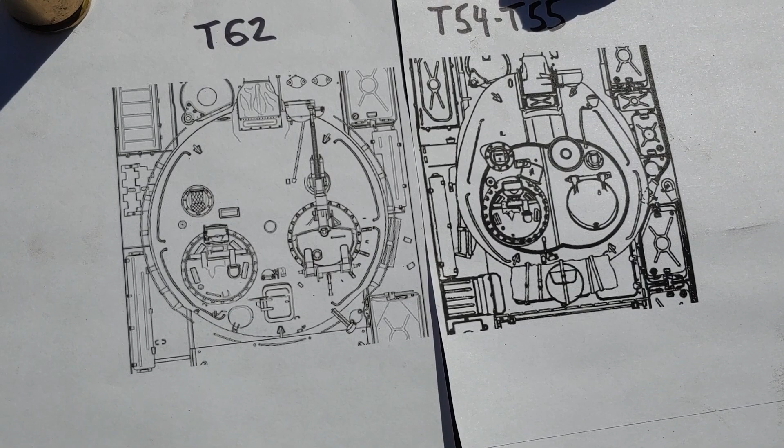Those key recognition features on the T55: the bore evacuator is way towards the front of the muzzle. At the end of the day, T55, T62, it's all about the gun. That spacing in the road wheels on the T55, right at the front there, the general overall shape of the turret, and the welded cast plates versus that one piece cast on the T62.

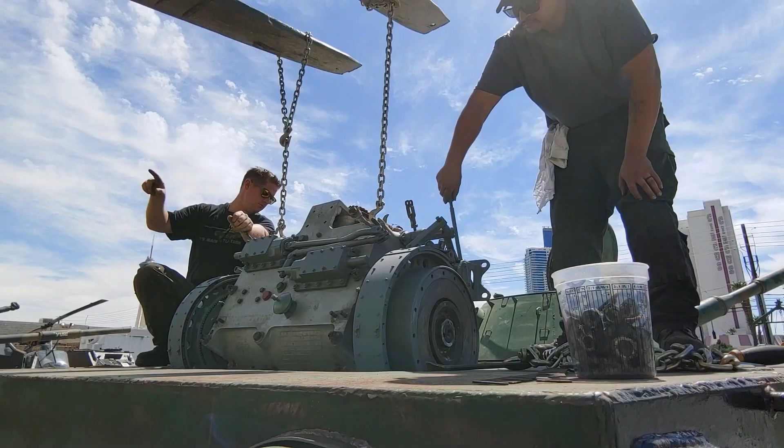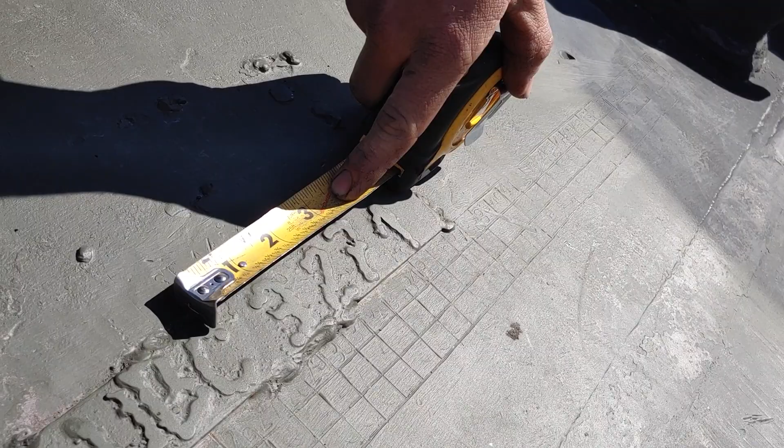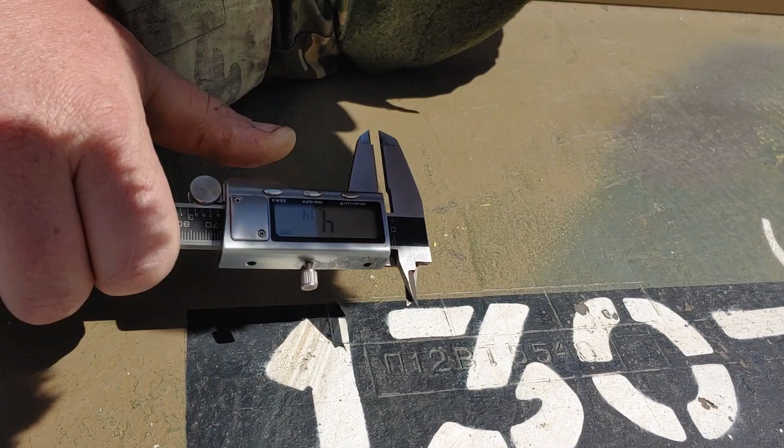Hey Scott, we got 0.6 centimeters between the lettering on the serial number. Oh, alright. I got 4.14 micromillimeters. So how many rivets have you got so far? I counted 3,871.6 rivets. Well, I got 3,876.2 rivets. So it's different. Yeah? Looks so. Count it again. All right?

Okay, rivet counters, this one's not for you, all right? No more. That's it. We're just going to talk about the basics. We're not counting rivets.

We have the T55 AMS, which is a very heavy Polish modification, and then we have a mod 1972 T62A used by the Syrian army. Now these tanks have evolved quite some way from their base when the Soviets actually built them. So we're not going to focus on specific upgrades that the Polish might have done for the Merida system, or what the Syrians were doing. We're just focusing on the nuts and bolts T55, T62 without getting into too much further depth on the different variants.

Alright, it's a T54, T55 was produced from 1946, and according to some sources about 100,000 of them were produced. Then T62 was produced from 1961, with estimates of between 19,000 and 22,000 of these ones.

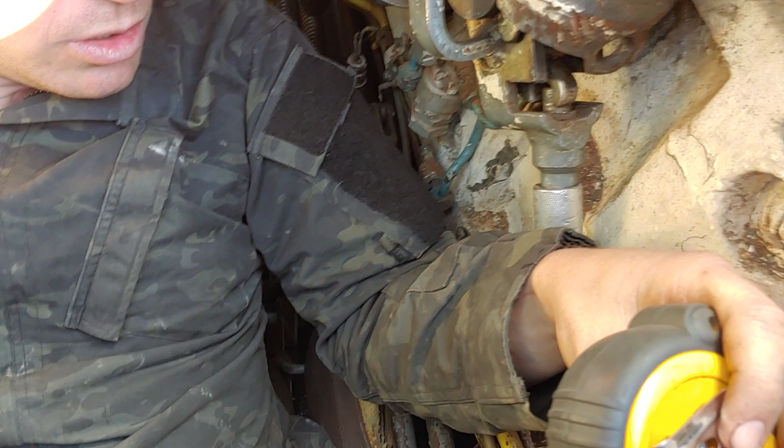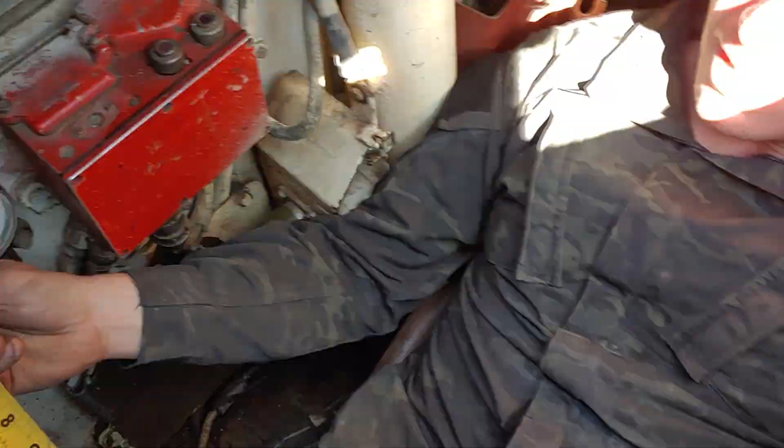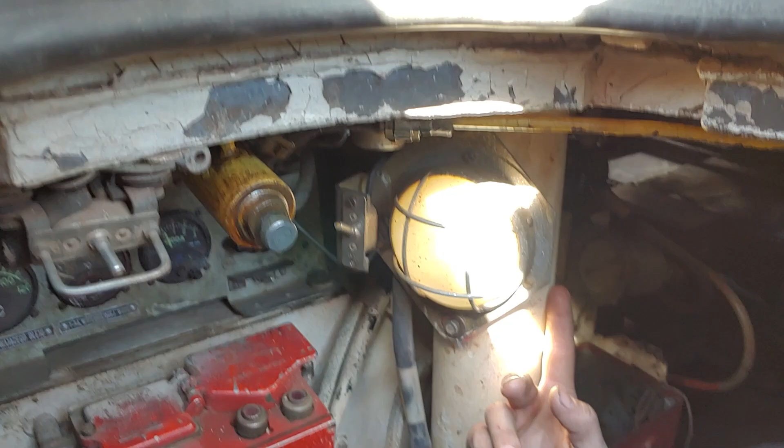So we're inside the T55. We're measuring from the battery box over to the sidewall. There is the nuclear protection layer right here, which is roughly an inch thick. Right now we're measuring at about 31.5 inches. So in the T55, one of the reasons it may feel smaller - well, it does feel smaller inside here - is that we have this post right here, which might be some sort of structural beam, and we also have the fire suppression control box, which in the T62 is actually located forward and kind of more out of the way.

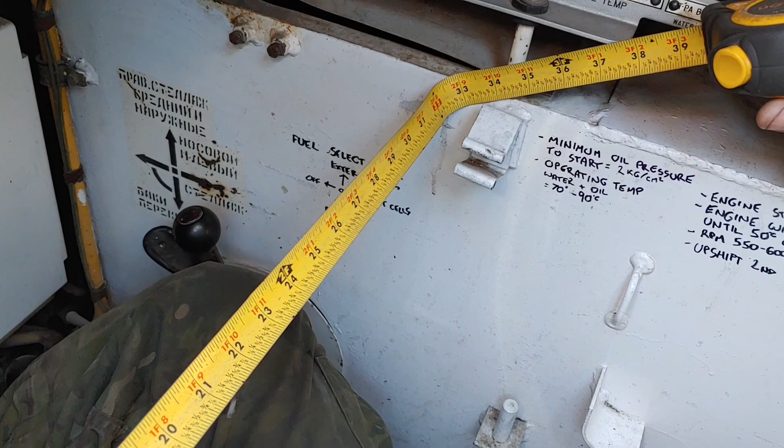Alright, so now we're inside the T62, and as you can already see, I'm basically sprawled out like I'm in a lounge chair. But measuring from those same spots, just below the dash on the battery box, it's only 39 inches. So some of that distance might just be taken up by that nuclear protection sheet the T55 has. This one does not have that. But yeah, I'm shocked as well.

I don't know where this extra room is coming from, but we don't have that big post here right next to the driver. And that fire suppression control box is also being moved up under the front here, so we do have a little bit more space here. There's room here for an ammunition box for the PKT, but other than that, as far as the driver's hull goes, it is basically the same. I just don't know why it feels so much more cramped inside the T55.

But this tank definitely feels much more spacious. So one of the most common and popular ways to tell the T55 from the T62 is actually the gap space that we have between these two road wheels, which is in the front of the T55 compared to the T62.

So on the T62, that gap is actually moved towards the rear of the tank, and rather than one big gap, you have 3 road wheels evenly spaced, with the gap broken up and that road wheel in the middle taking up the difference. I guess that's where the added length of the vehicle comes from, and how they configured the track.

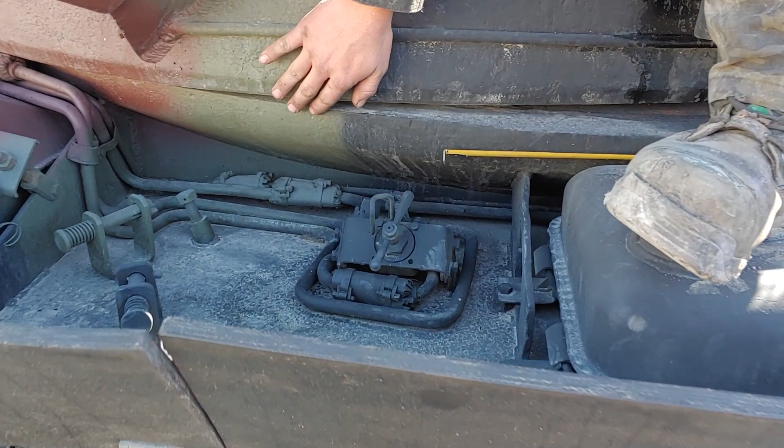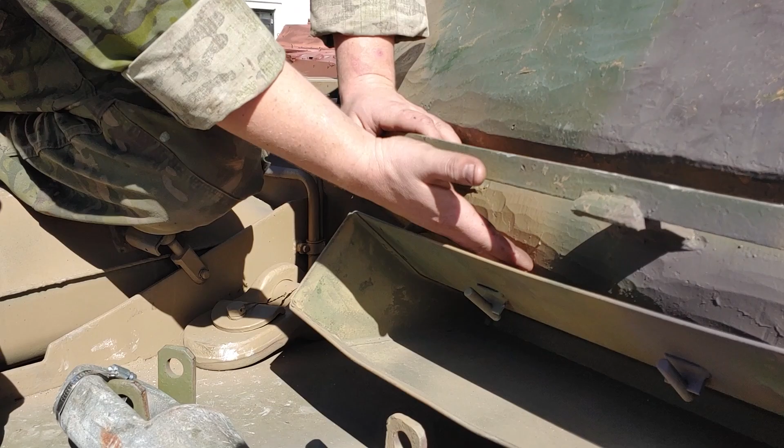On the T55, one difference between this tank and the T62 is that it has an overhang over the turret ring, which has to do with the shape of the turret itself. On the T62, the key difference is the gun, and to accommodate it there's a much wider turret ring and different turret shape, sticking out far wider at the base where the recess takes the turret.

Another difference between the T55 and T62 is this right here. Even though this is a Polish variant, the Soviet variant is more or less the same. Look for these weld seams and the bolts holding this in. The T62 turret is wider and one-piece cast rather than welded, so there are no seams, and the recess for the cupola is just machine cut into the top of the turret.

So again, the T62 is completely cast down the side there.

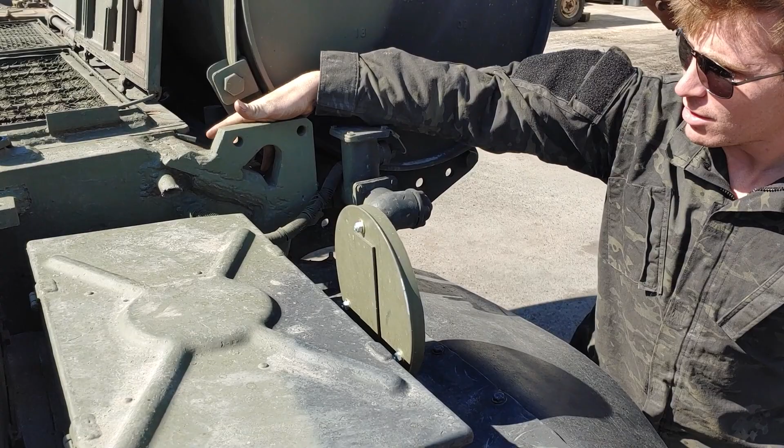Over on the back of the T55, I'd like to point out a couple of differences between it and the T62. Pay note of the angle right here on the back deck — it's angled slightly this way, as well as down here, where the back of the engine bay is not straight, it's angled itself. Also pay attention to the difference in length between the T55 and the T62.

So here we are at the back of the T62. Take note, this time there are no rear angles or sloped angles — this one just drops straight down.

As most of you know, in the armor world sloped armor helps deflect rounds, but with the technology and armor-piercing ammunition of the time, it might not have been so important anymore to have sloped armor at the rear, because a slope costs you interior space. So perhaps they got rid of that rear engine bay angle to open up more room inside, resulting in that straight drop-off at the rear.

One difference we noticed, though we don't know if it's specific to the T55 or T62, is in the mounts for the Dushka. On our T55 versus the T62, one noticeable feature is this triangle-shaped mount on the back plate here, which the T62 does not actually have.

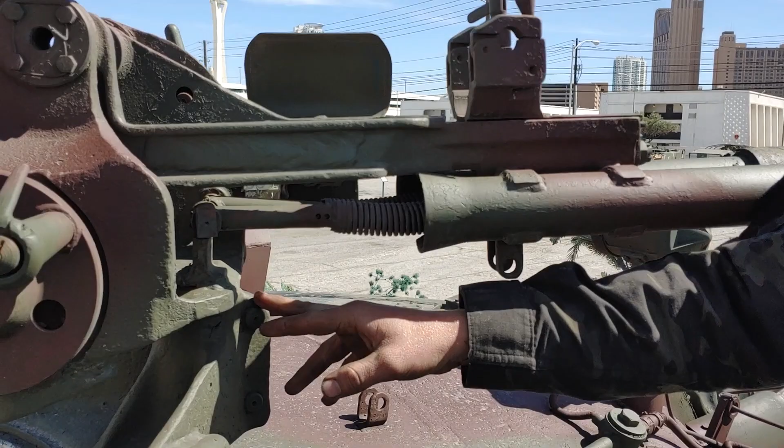Another important feature is that here you only have these two shocks, whereas the T62 actually has an extra set of shocks on top. The mounting pin itself is also a lot different from the one on the T62. Again, we don't know if that's a difference between the two tank models or just a different model of Dushka mount, but it's something to note.

Another difference between the two Dushka mounts is how it actually clamps to the gun. This one has more of a fold-down clamp style — these just screw on here and close down — versus the T62.

On the T62's 12.7mm mount, the noticeable difference we've seen so far is that this one has two buffers, or miniature shocks, at the front of the trunnion mount to absorb some of the recoil. On the T55 mount, that's just a standard fixed point. We're not as knowledgeable about 12.7mm mounts themselves, so whether this is a specific difference between the two tanks I'm not sure — I doubt it, it's probably more to do with upgrading in general.

However, one thing we can be certain of is the mounting style of these mounts on each tank. As you saw on the T55, it's more of a post-style mount. On the T62, the base of this one is a giant cup with a locating dowel that drops in at 90 degrees and then locks into place.

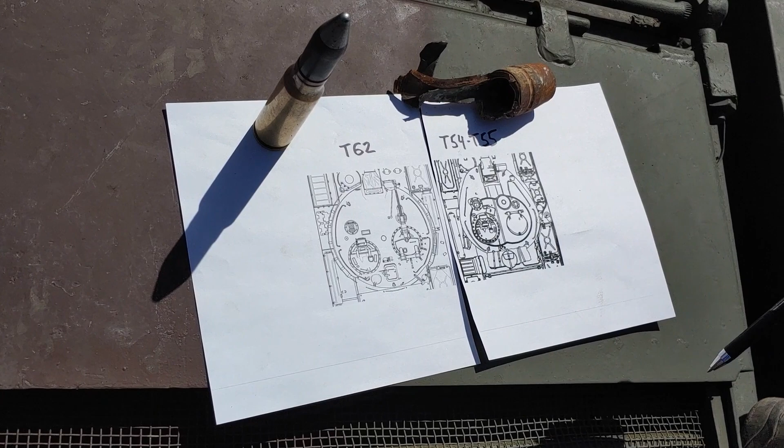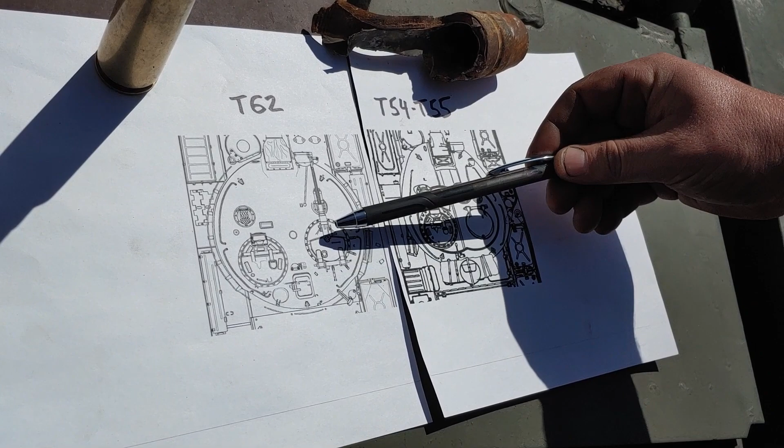So we talked about the differences before in the turrets, but now we have a blueprint we can actually show you. Looking here at the T55, you can see that drastic difference in the actual width of the turret. So when they say this thing is wider, this is really what they're talking about. And obviously, being the T62, they had to do this to accommodate that much larger gun.

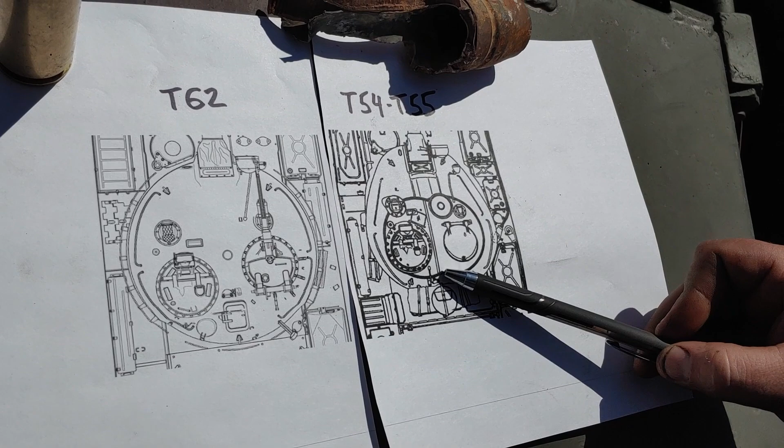But at a glance, spotting the differences between the two, the T55 is actually a multi-piece welded turret. So when you look at a T55 turret, you'll see a weld seam very prominent up through the middle here, and then you'll see your weld seams around the sides, and one across the back, plus those prominent bolt marks we were talking about on the cupola.

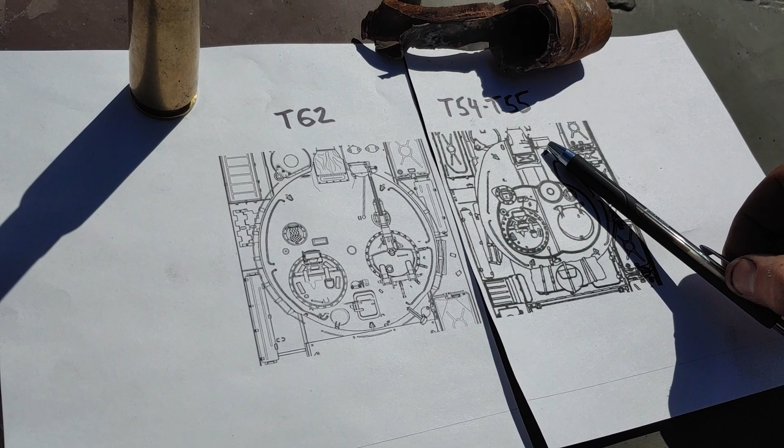In addition to those bolt holes we just spoke about, notice that the T55 turret is more of an egg shape, and it thins out towards the front here, whereas the T62 is that perfect concentric circle. That's a huge noticeable difference once you're inside.

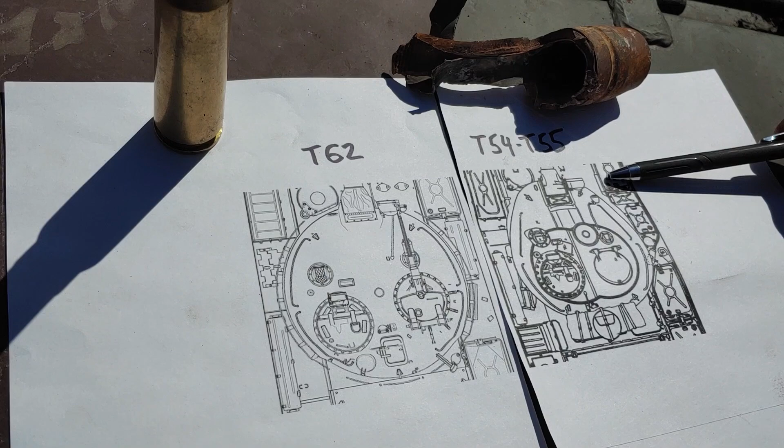And earlier today, when we referenced that overhang and cross-referenced that known point of the fuel tank, you can see here it lines up very close to the edge of the fuel tank, whereas on the T62, it almost comes out well over halfway of that same known reference point, which is the same on both tanks.

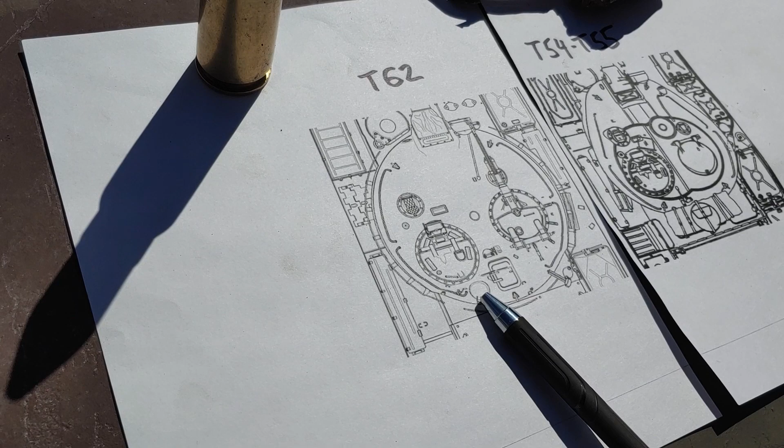Other than that, we also have the well-known auto eject feature of the T62. There's that auto eject door for it; we're going to touch on that. We also have our vent fan port here on the T62, which is not prominent on the T55. And basically, at a quick glance, that's the major differences between the two turrets.

As you look at the top of a T62 turret, there's no weld seam, so we don't have that seam running down the middle — it's just a perfect cast. No seam at the back here either. That missing seam at the back means we actually have much more angle out this way to compensate for the rear of the gun, and of course that infamous ejector tray.

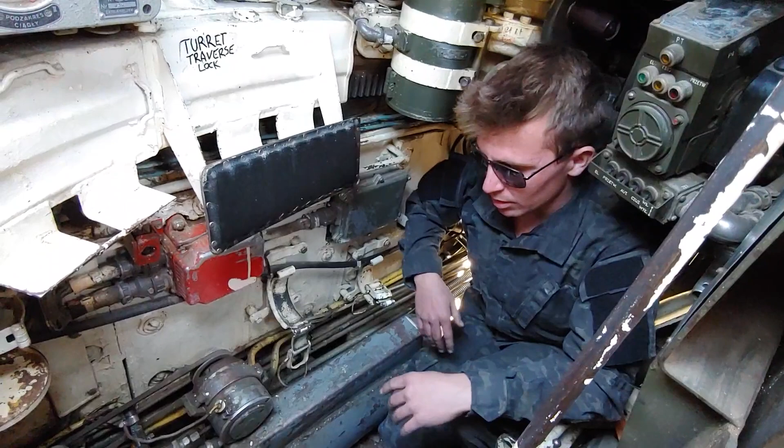An important difference that's more noticeable if you're actually inside the turret, and more likely for a crew member, is the length of the preheater. The T55 has a lot longer preheater than the T62, which you'll see in a moment. It extends all the way up to where the gunner is.

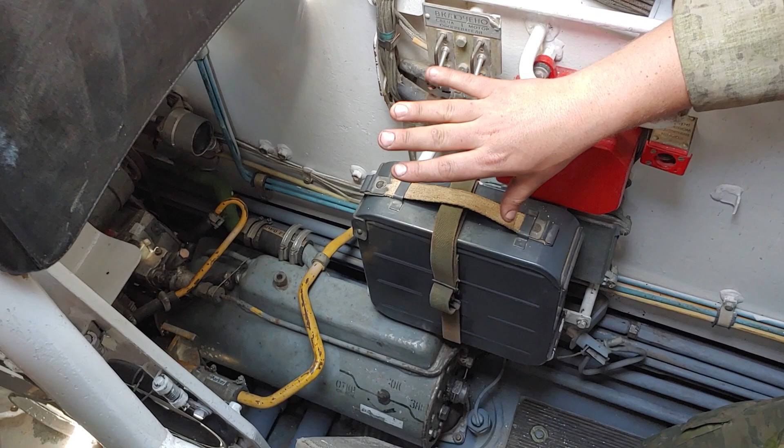Okay, so now inside the T62 crew compartment, that same preheater we just looked at, you can see here it is noticeably much smaller. It's actually recessed a little bit further back behind the turret, closer to the firewall. And the main difference is that the burner unit is significantly shortened, much more.

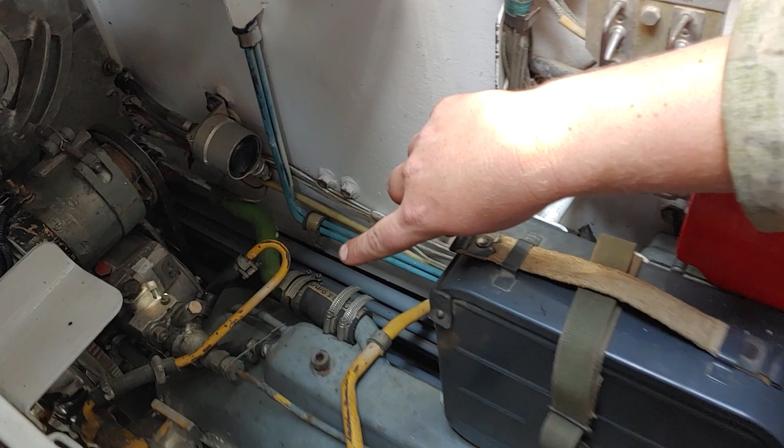And the layout of your components for your pump motor and the pump itself is essentially configured to make a much shorter unit. So the crew commander has a little bit more legroom and space immediately below his feet, and maybe the gunner has a bit more space where he's sitting.

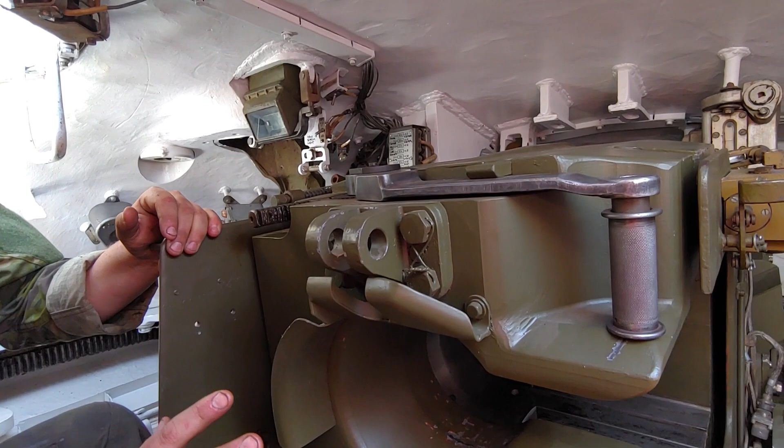The gun itself, other than the fact that it is a smoothbore, the breech ring is generally the same design and concept as the T55. However, one major difference is your recoil system and replenisher, which is actually relocated from the top of the gun all the way down to underneath the gun. So later on, we're actually going to measure the difference in how much you can lower the gun.

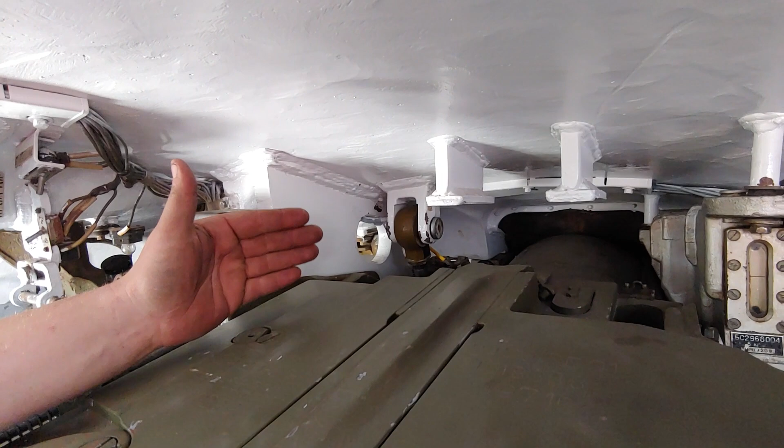Hazarding a guess at first glance, if they've relocated those recoil cylinders from the top of the gun on the T55, we've gained a little bit of extra space. So by relocating those down under the gun, maybe we'll be able to gain a little more depression in our angle. So later on today, we're actually going to measure that and see how it pans out.

So the first thing you might notice is how much more compact the inside of the turret is. From shoulder to shoulder, you're always touching something. Even the back of the turret feels a lot closer.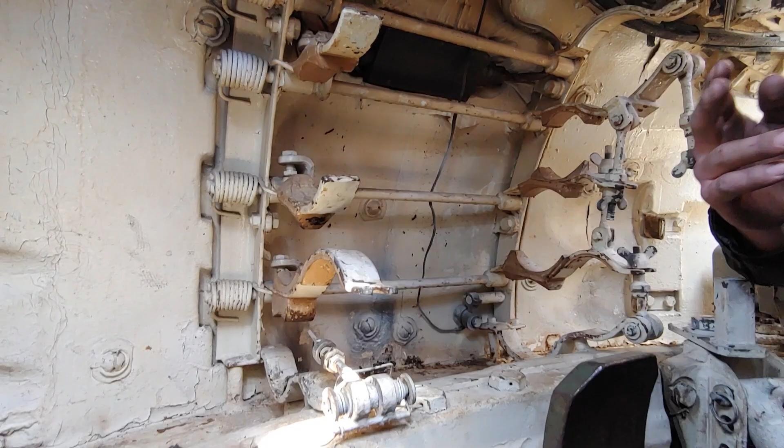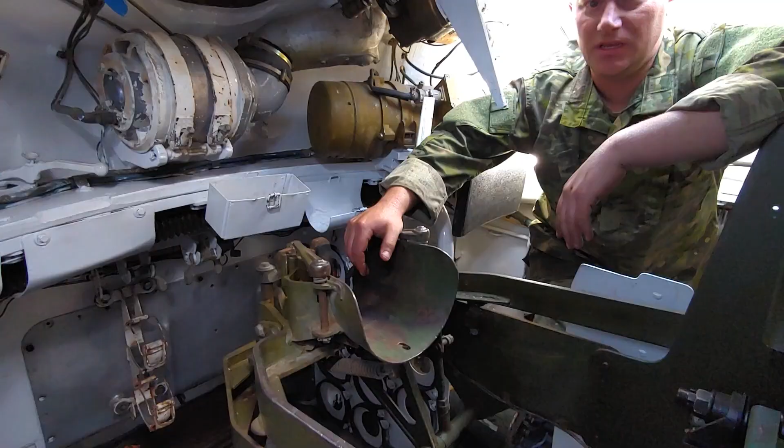The other thing to mention is the recoil system. As Scott mentioned, it is actually on top of the gun versus the T62, which sits right underneath. The T55 does still feature that kind of rear turret basket area, but no auto eject tray. And then moving up here to the auto eject door, which you've seen previously, and the exterior vent fan.

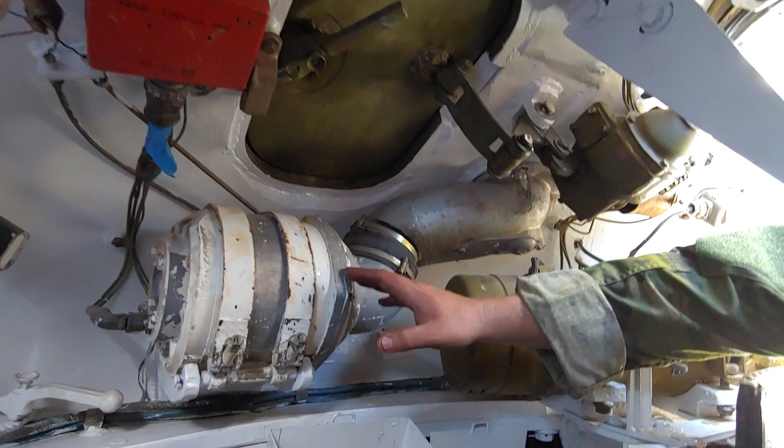The basket, while it doesn't have the same auto eject system as the T62, still does have a basket tray that extends to the back right here.

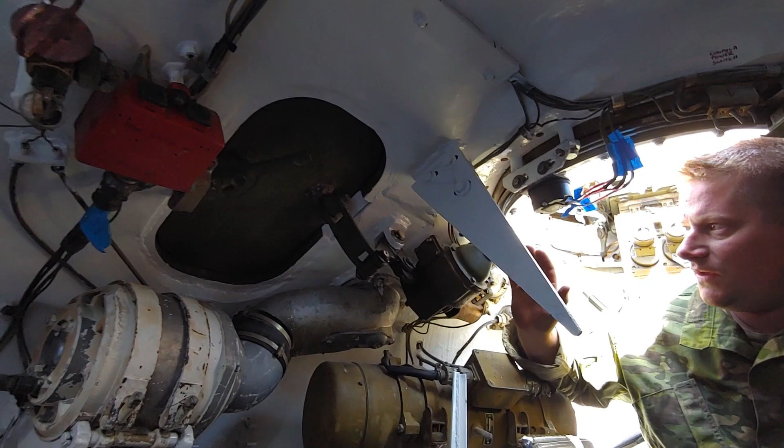Another difference is the location of the power assist motor. As opposed to being forward, underneath in front of the gunner, they've moved it to the rear of the crew commander now. So that's it right there. And these mechanisms for the auto eject features, they're not there in the T55.

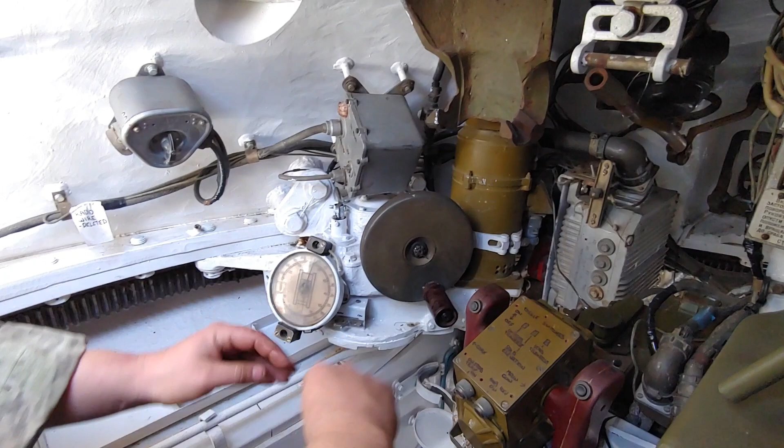As you can see, the turret ring, as Scott mentioned on the T62, is a lot farther out compared to on the T55 right here. It is literally just right there. There's not room underneath. It's a lot tighter of a fit.

So much to my surprise, that difference in moving the recoil cylinders from the top of the gun to the bottom of the gun has done what appears to be almost nothing to gain any extra depression in the gun. Maybe they did that because of changes in the gun design itself, and they relocated those recoil cylinders, or perhaps it's a balance issue. Someone out there hopefully might be able to answer us on that one.

Now let's check elevation. As you can see, the difference in elevation is also almost minimal. The T55 is slightly, just a little bit higher. At this point, I'm guessing when we're looking at the elevation gearbox itself, the part numbers are almost exactly the same in terms of the gear knuckle and the track that it travels on. We're limited by the amount of space there. So you have equal elevation and depression almost.

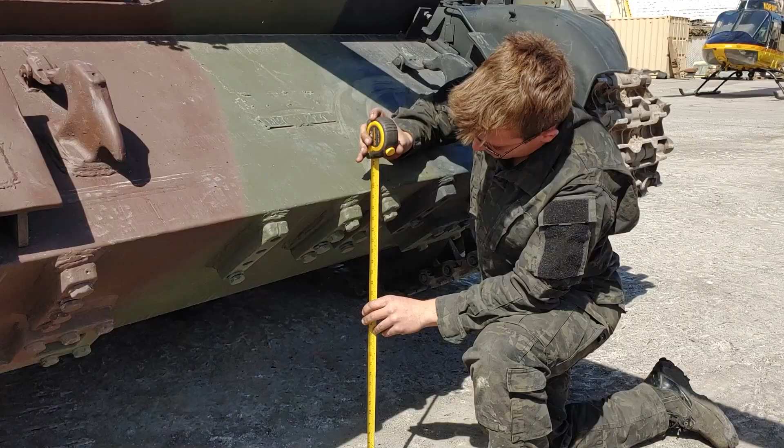The suspension difference between the T55 and the T62, as you'll see in a minute, is very slight. The T55 being about 31.5 inches, give or take, with ground differences, while the T62 measures in at 34 inches.

One of the reasons that they may sit higher, the T62 being slightly higher than the T55, is that the T62 actually has an upgraded suspension system, which allows for more travel on the torsion arm bars. The thing to note is the weight difference. They're not that far apart, the T55 being about 36 tons and the T62 being about 37 tons.

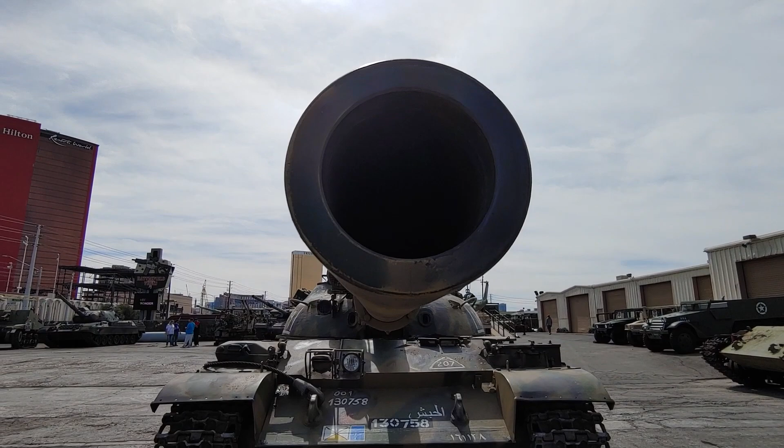Alright, so at the end of the day, T55, T62, it's all about the gun. Here we are, the long-awaited moment. So we have the D10 100mm rifled bore, and then the upgraded 115mm 2A20 smoothbore gun.

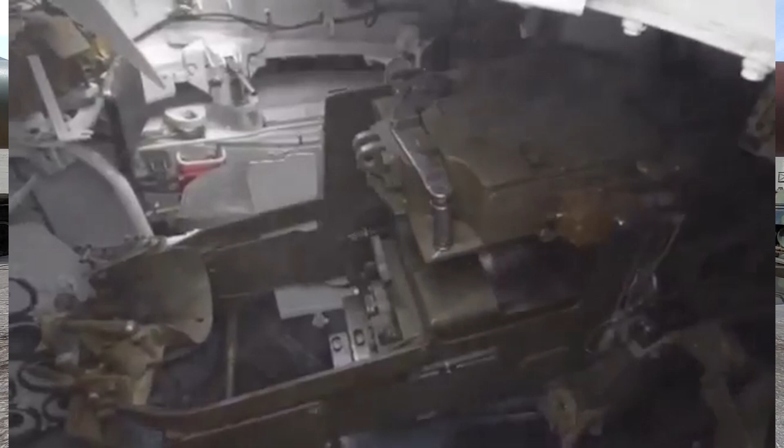At a glance, you'll notice that the placement of the bore evacuator is on the very front of the gun itself. And then here we are on the T62, that bore evacuator, which serves the exact same purpose, is now recessed back off the front of the gun, maybe to about 3/4 of the way up the gun from the turret.